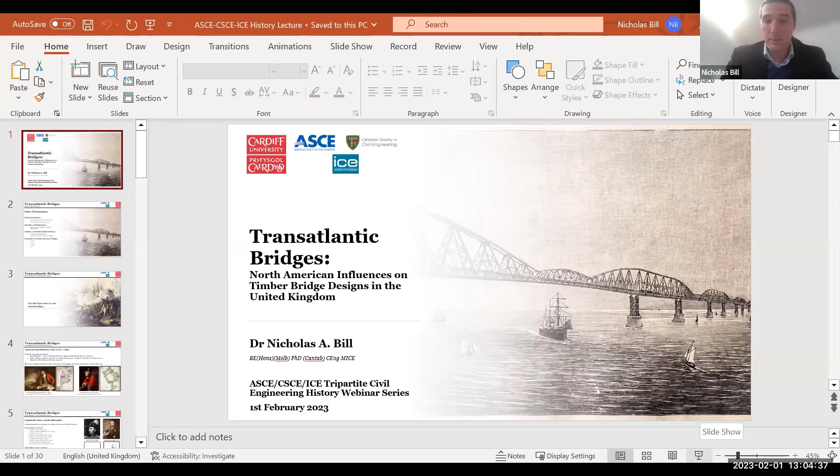Thank you for that introduction, and thanks to everybody for logging into this session, wherever you happen to be. I do think this lecture series is a great initiative, and I hope it continues and fosters further collaborations between our societies. If nothing else, I hope today's lecture is a reminder that we've always had much to learn from one another. Some of you might be surprised, because this lecture may fly against many people's preconceptions regarding the history of technological transfer across the pond, since most people would probably view it as unidirectional, certainly before the 20th century. But we Brits have always been willing to adopt good ideas from abroad, and indeed there are many ideas we've actually ripped off and called our own over the years.

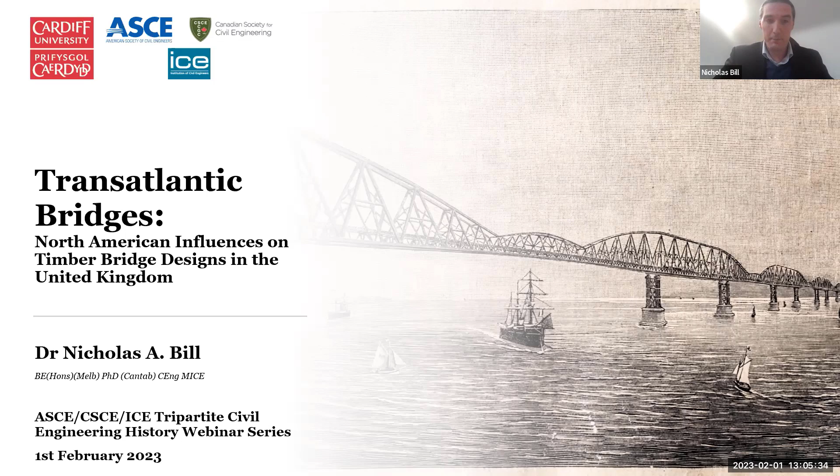Timber construction represents just such a case, and it's interesting to see the origins of some of these designs against the backdrop of developing structural iron. There are four main areas I'd like to focus on in this presentation. I want to begin by discussing some of the early interactions, particularly those who saw military service in North America, as it is highly relevant. Then I want to discuss the role that publications played. Before we get into specific examples, I'm conscious that not everyone will be familiar with what was built in Britain and Ireland, so I'd like to dedicate a slide to the various forms, particularly the homegrown forms. And then finally we'll look at the specific examples that made their way across the Atlantic, with a note about their likely origins.

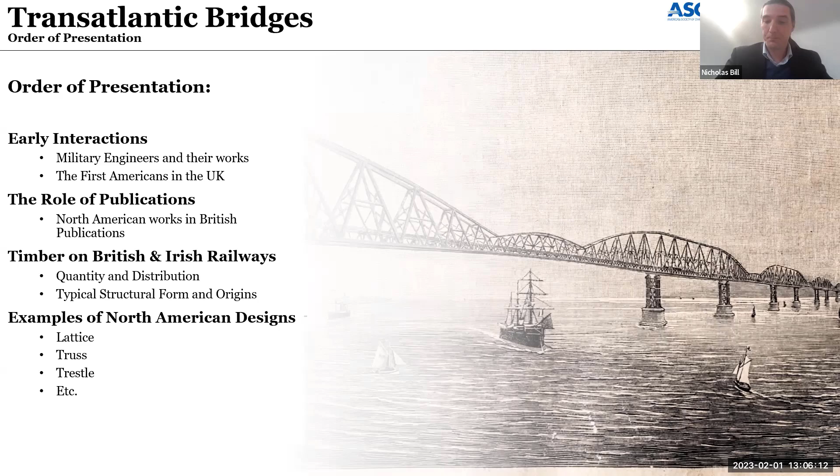If we begin by looking at early British and North American interactions, it's probably fair to say that things didn't get off to the best start.

But regardless, as one would expect, these interactions began well before the advent of the railways. What's strange is, unlike the situation with Britain and continental Europe, war in many ways actually facilitated many of these important connections. It effectively brought the first group of professional engineers to North America who would return to the UK with new ideas. These men were the UK's Royal Engineers.

Essentially, these were the military engineers of the British Army. What's interesting is that from 1741, these men were trained at the Royal Military Academy based in Woolwich, in what was the first technical school in the British Empire. They were given intense instruction in mathematics, mechanics, ballistics, hydraulics, etc., by some of the UK's finest mathematicians and scientists. This started almost a century before civilian engineers took theoretical education seriously.

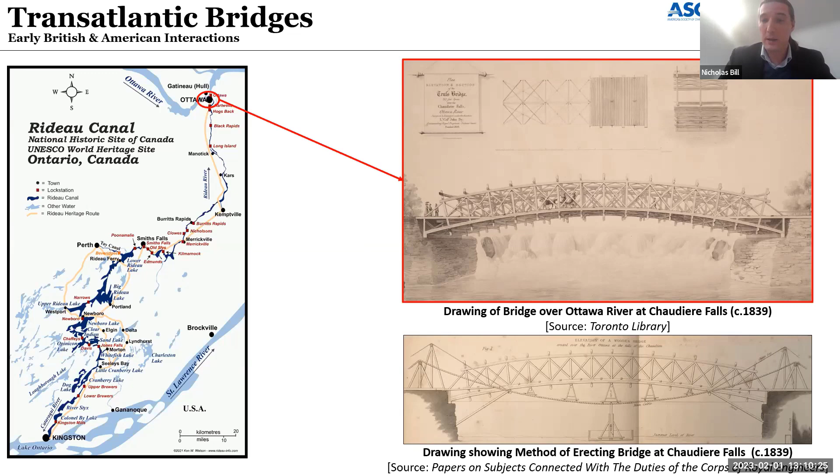Now, By had been stationed in North America for many years before, and he actually brought back American bridge designs. This is evidenced by some of the models that he constructed when he was working in the gunpowder mills back in England. When bridging the Ottawa River, By demonstrated his knowledge of American practices with a design similar to the Washington Bridge built in 1796 by Timothy Palmer. This example spans 212 feet, formed of 3 parallel trusses 12 feet apart. So it's quite a substantial structure.

Further examples of the Royal Engineers copying American designs appear in the likes of Sri Lanka. This concept for this bridge appears in Sir Howard Douglas's treatise on military bridges, and is thought to be a copy of the bridge over the River Portsmouth. Interestingly, Sir William Denison would later cite this as an example to follow whilst he was serving as the governor of New South Wales in Australia.

What's really interesting is that New South Wales would later become known as Timber Bridge State. What's particularly interesting is that you see huge influence of American long-span trusses across that state, both in road and rail bridges. The Royal Engineers continued to take an active interest in American infrastructure projects, with many embarking on personal tours. They even acted as observers in the Civil War and crossed both sides of the lines. Now, whilst these men didn't build railway bridges in the UK, they weren't without their influence.

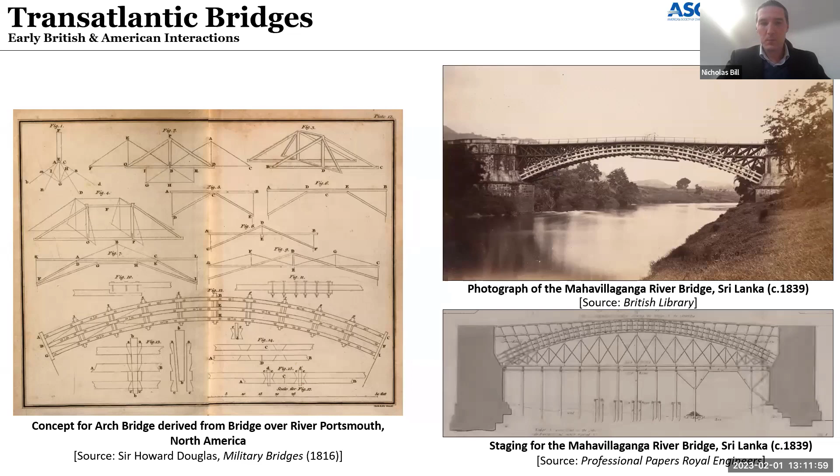What's interesting is that until the 1960s, all the inspecting officers of Her Majesty's Railway Inspectorate, who had to inspect and approve bridges before lines were opened, were exclusively seconded from the Royal Engineers. So these men recorded a lot of detail regarding rail structures as part of their inspection reports. Some of these are quite detailed, such that we get much of our understanding of these bridges, and how they performed, from their reports.

Now, with the end of hostilities, we obviously had the resumption of trade, and with it you start to see the movement of engineers and other technical tradesmen. This happened across the border within North America, and it also happened across the Atlantic. Whilst most historians will typically focus on the attempts, especially in the United States, to acquire certain technologies, and indeed some of our previous presenters in this series have focused on these activities, what's less discussed is some of the people who actually left the fledgling United States for various reasons and tried to ply their trade elsewhere.

What's interesting is that Cox also brought over both the timber and the skilled workmen from America. This practice would later be replicated in the late 19th century by American steel mills who sent men and prefabricated buildings over to Britain. That's a whole other conversation, but for those in the UK who are interested in that, look no further than the example of the Bristol Tramway generator building as an example.

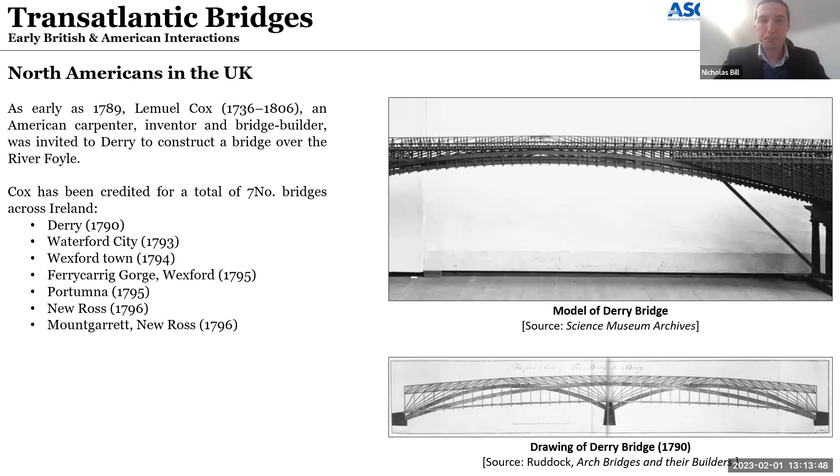But before these steel companies in the United States were in the position to do this, they first had to acquire the necessary technology. So in the very earliest years of the fledgling republic, the United States actively encouraged various methods of acquiring technology, from sponsored visits to almost outright industrial espionage.

One of the series' previous presenters, Mike Chrimes, highlighted the role of William Strickland in the development of the canals, but his reports also extended to the railways.

Some American engineers went specifically just to buy materials and equipment, such as Horatio Allen of the Delaware Hudson Canal Company. Allen would purchase locomotives from John Urpeth Rastrick, and also made the acquaintance of George Stephenson. Both of these British engineers would later go on to build timber bridges.

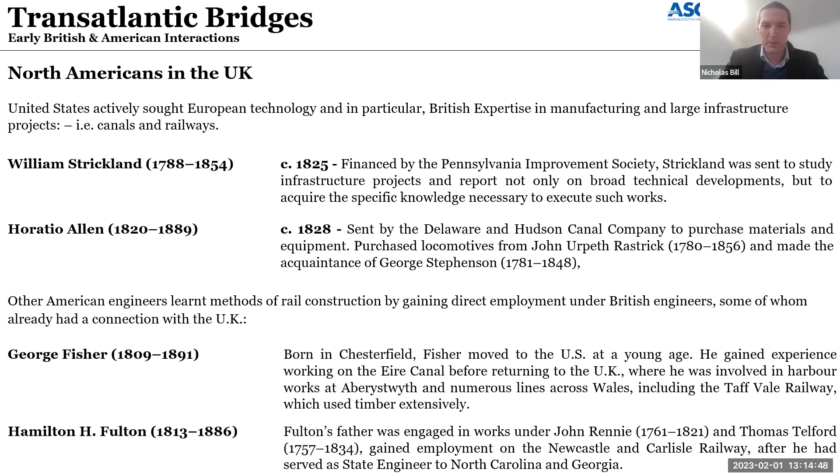For American bridge builders, the rapid developments of iron rail bridges provided an incentive to embark on their own personal tours, whether to gather information or to sell their ideas. We all know that Ithiel Town visited continental Europe and the UK between about 1829 and 1830.

What's interesting is upon his return, he acknowledged that his original pamphlet describing his designs was quite defective in many ways. Although we don't know exactly what he meant by that, or where and when he came to this realization, it has been speculated that he was heavily influenced by George Smart's original design. This begs the question as to what is more influential: an obscure patent that someone had forgotten about, or well-published and promoted designs.

Similarly, at the height of the railway mania, we had Irish-born, American-trained engineer Richard Boyce Osborne, who traveled to the UK acting as William Howe's agent. We know that Osborne presented a model of Howe's bridge to Robert Stephenson, but Stephenson was rather preoccupied with designing his tubes at the time.

He did, however, have much more success in his dealings with Charles Blacker Vignoles, who was planning the Waterford and Limerick Railway and was keen to cross the River Suir with a record span. Although that particular bridge wasn't actually built due to lack of funds, I believe there was a total of 14 iron Howe truss bridges erected between Limerick and Tipperary. These were all designed and fabricated by engineers and contractors from the Philadelphia and Reading Railroad.

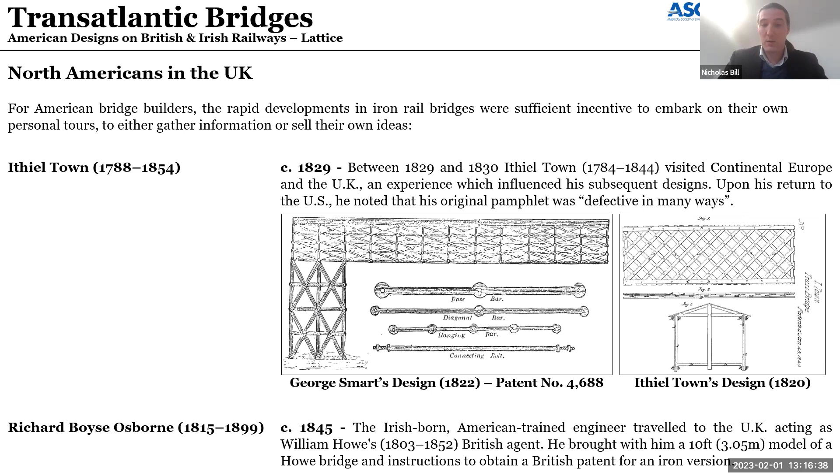The dissemination of North American bridge technology went much further than simple personal observations and interactions between those who crossed the Atlantic. Printing technology improved dramatically in the 19th century, and so did the quantity and quality of technical manuscripts, from individual treatises to published journals. As the number of technical publications increased, so did accounts of North American practices, to the point where it would have been practically impossible for any British or Irish engineer to remain entirely ignorant of developments in North America.

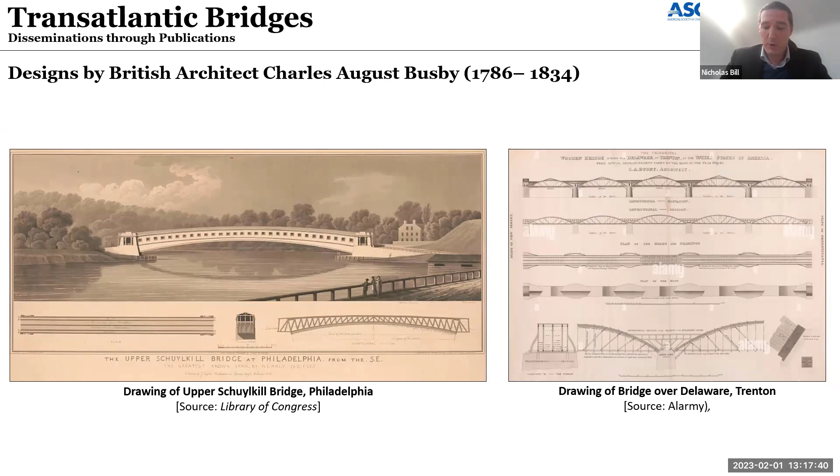Initially, these included isolated accounts of individual structures of significance, particularly within travel books, which had grown enormously in popularity. Others include descriptions of buildings and structures published by the likes of British architect Charles Augustus Busby, as we can see from the slide, in his account of the much celebrated bridge over the Delaware in Trenton. Although this is credited to the American Theodore Burr, the design of this bridge at Trenton embodies the complex exchange of ideas, with its true origins actually lying somewhere in Somerset in the southwest of England. So again, we have this fuzzy period as to where these designs are actually floating around and who's reading what.

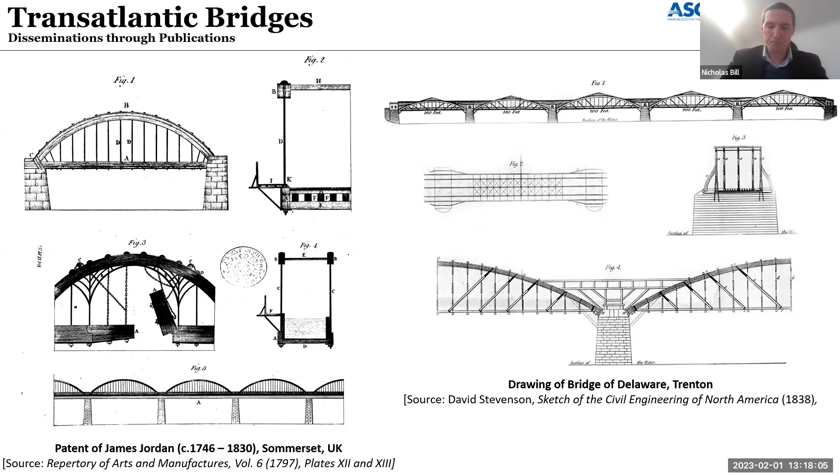Comprehensive accounts based upon study tours were soon published, but whereas the likes of William Scarth Moorsom's Letters from Nova Scotia, published in 1830, provided just a general account of the colony, you start seeing publications such as Sketch of the Civil Engineering of North America in 1838 by the engineer David Stevenson. Now, this focused specifically on engineering projects and provided detailed descriptions of the drawings, which you can see from these slides. He wrote chapters on both bridge construction and railways, and Stevenson produced the first favorable account of Town's lattice and Long's patented frame bridges.

Stevenson's account of Town's patented lattice bridges constructed on the Philadelphia and Reading Railroad actually followed his meeting with their French-trained engineer, Moncure Robinson, who provided Stevenson copies of these drawings. So again, it's interesting to speculate where some of these drawings were actually acquired.

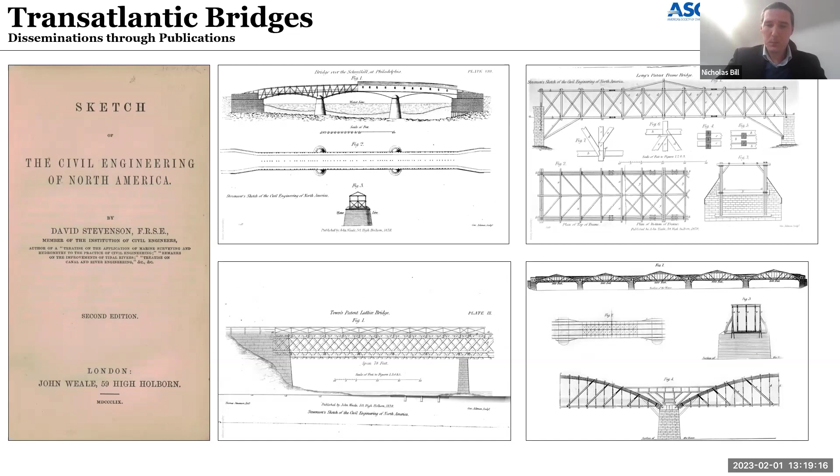Soon enough, British engineering journals began featuring articles on North American engineering practices. And indeed, the very first article of the Civil Engineer and Architects Journal in 1837 contained a feature on American railroads. Likewise, the Artisan, a similar publication, followed suit. Some of the earliest papers presented at the Institution of Civil Engineers also focused on American railroads.

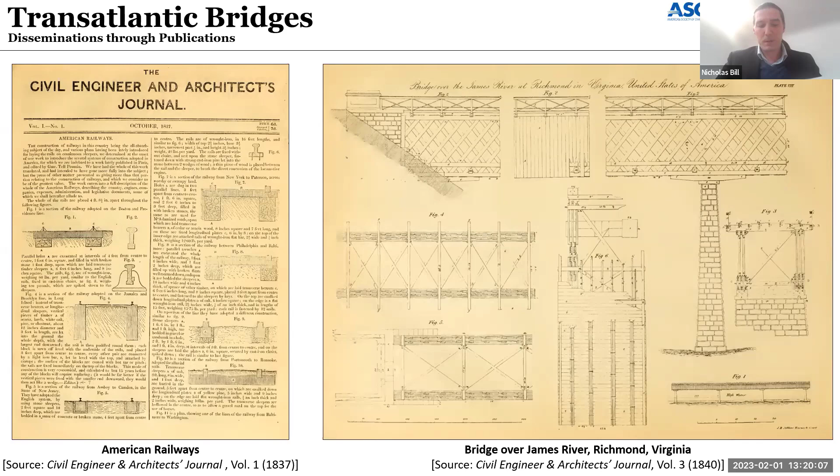What's interesting is Weale also, as with many of his contemporaries, was quite keen to emphasize the financial model on which these timber structures were adopted. That typically involved lower upfront costs in order to open the railroad earlier and start recuperating money. And that was seen as one of the key drivers of adopting timber.

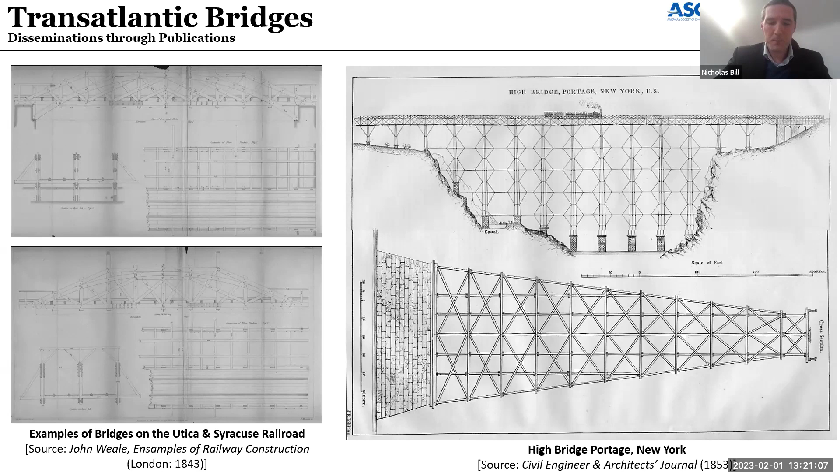It continued. In 1858, we have the American engineer, technical journalist and publisher Zerah Colburn. He actually moved to England to take up his position as the editor of The Engineer, which was by then Britain's leading weekly technical periodical.

Colburn's role provided him with an opportunity to meet many members of the ICE, including Isambard Kingdom Brunel, who produced hundreds of timber bridges. Colburn himself was later invited to present a paper to the institution, but this was on iron bridges, which you can see on the top of the slide. At the same meeting, we get a chap by the name of James Robert Mosse, who was an engineer from Halifax in Nova Scotia, who published a similar account on American timber bridges.

What's interesting is Mosse was actually a pupil of William Scarth Moorsom on the Birmingham and Gloucester Railway. After a stint as his assistant engineer on the Waterford and Kilkenny Railway in Ireland, he returned to North America to work on railroads, and I believe he crossed the border between the US and Canada as well.

His paper in particular includes illustrations of Howe truss designs and the first known account of Daniel Craig McCallum's inflexible arch truss, which is seen on the bottom.

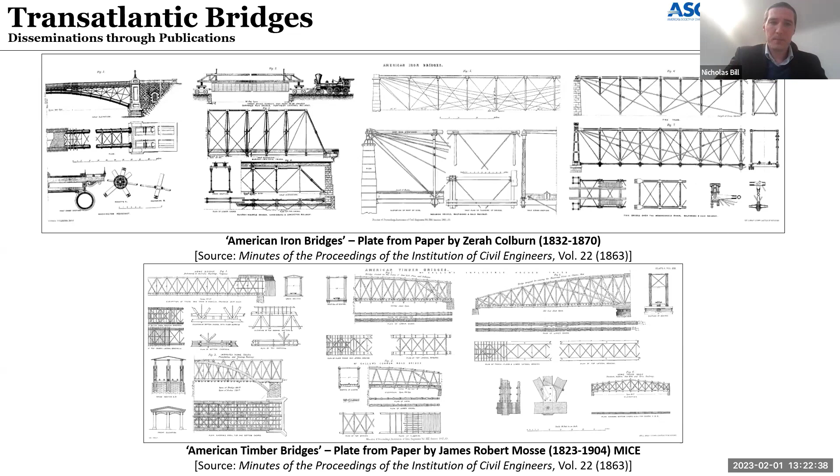Towards the late 1850s and early 1860s, we start seeing American publications republished in Britain. In particular, in 1862, we see Haupt's General Theory of Bridge Construction, which was the first version exclusively for the British market, featuring many diagrams demonstrating American timber bridge design.

The original publication was released in 1851, and we know this was already popular with British engineers because of comments made in inspection reports. It had also become the recommended reading to the Corps.

So again, this raises a really interesting question, and I'd love to discuss this more, about where they were actually sourcing these books, and what sort of network of exchanging technical information was in place, particularly in published texts.

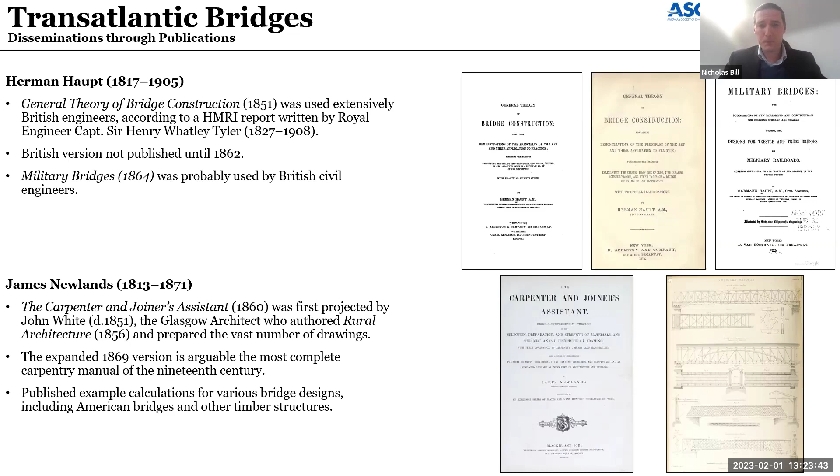Armed with this knowledge, how did we do things?

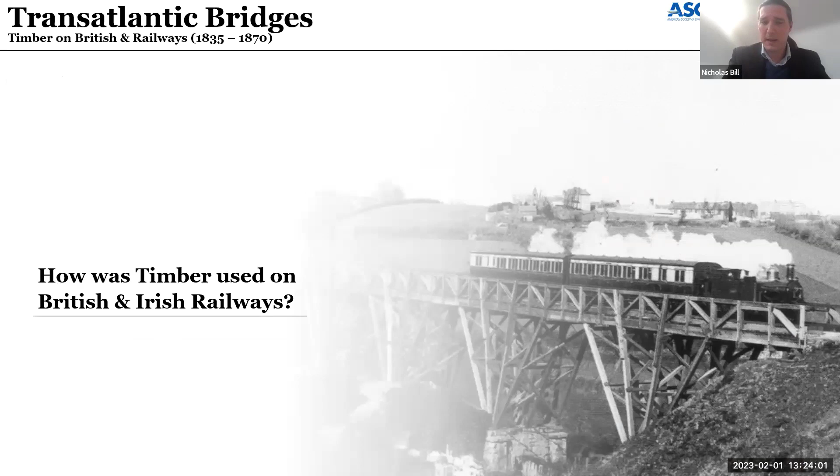For those who are interested, that's an example of one of Brunel's famous fan bridges. He built many of them in Devon and Cornwall in particular.

What may surprise many people on both sides of the pond is that between 1835 and 1870 alone, there was something like 2,500 timber structures built across British and Irish railways, and they were built across 268 different railways.

These railways were originally private companies which raised their own finance and operated independently, but over the course of the 19th century and early 20th century, they were eventually consolidated and ultimately nationalized just after World War II.

Now, in terms of application in the UK, and when I say the UK in this context, I also mean Ireland, because they were still part of the Union then, it broadly followed the overall trends of railway construction, which peaked around about 1848.

But timber construction continued well into the latter decades of the 19th century, even after 1870. I just, for other reasons, decided to cut my period of study off at that point.

It was also used across the geography of the UK, although we do see higher concentrations in typically more rural and isolated areas, especially places like Cornwall, Ireland, the north of Scotland, and also mid and North Wales.

What's really important to note is that timber was rarely the most dominant material used on any particular line. So it was very common to see timber, masonry, and iron bridges all on the same line, built at the same time. So whilst economics was a significant factor, quite often its use had much to do with the conditions of the particular crossing in question.

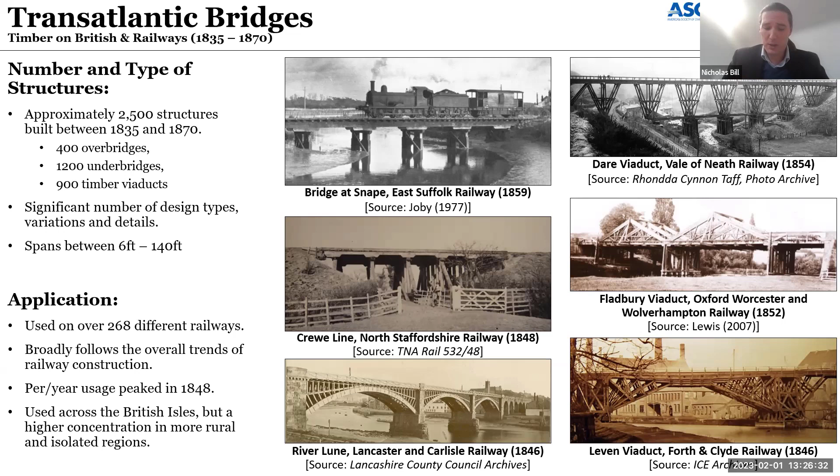When it came to larger spans, British engineers tended to demonstrate a clear preference for arch designs, which were either laminated timber or with polygon arches and their various derivations, such as fan structures.

Understandably, some of the earliest British designs copied from North America were, in fact, arch bridges, as we can see happening on road bridges first.

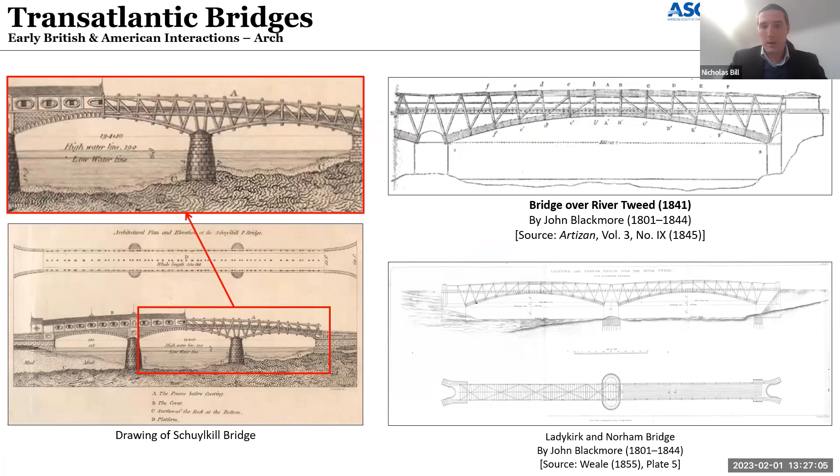John Blackmore's bridge over the River Tweed, seen here on the right-hand side, is a perfect example. It's almost an exact copy of the one on the left-hand side. What's more is it was actually cited by contemporary literary sources as an example for railway engineers to copy. Didn't quite work out that way, but you can see the precise origins of these laminated timber bridges, where we see the horizontal laminations across these arches, is somewhat contentious.

Typically what you see in these examples is the deck is placed above a spandrel frame that loads the arch from above. But when we look at the example that Vignoles built across the River Lune, we start to see North American influences starting to appear.

It's a clear, distinct departure from previous British practices. Given Vignoles' early history in North America, it's most likely that you can see that American influence.

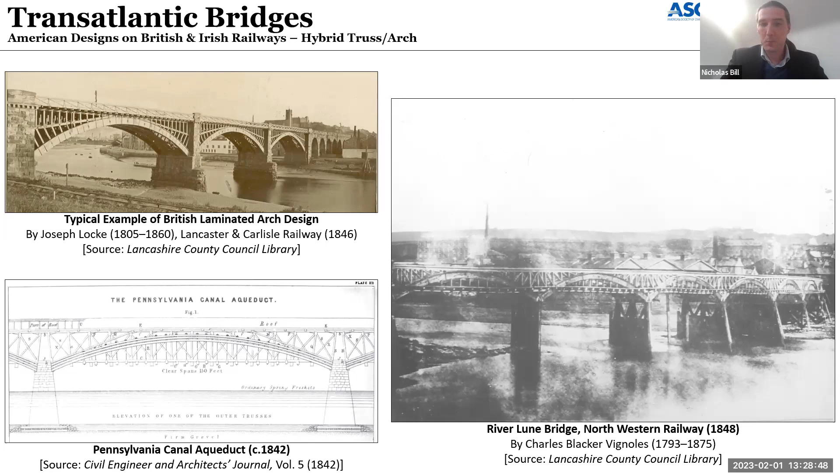There are also inspection reports suggesting that Joseph Locke experimented with integrated arch and truss bridges in Scotland around the same time. At Glenary on the Aberdeen Railway, Locke and his partner Errington reportedly erected a 14-span viaduct, each containing 60-foot spans formed of laminated timber arches placed on either side of a Howe truss.

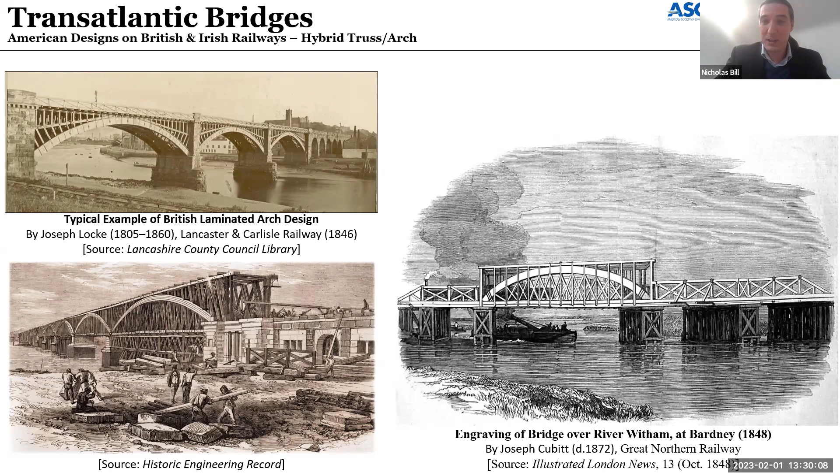What's really frustrating is the drawings are in a fragile state, and the archivists won't let me see it, and it's not been digitized. So it's incredibly frustrating. I hope to one day see it and confirm what it actually is, but I suspect it's a similar design to what we see on the right-hand side.

There is much clearer evidence of hybrid designs mixing trusses with polygon arches. Here on the right-hand side, we see a Howe truss integrated with polygon arches in what is a very clear copy from America.

The one on the right-hand side was built for the Peterborough branch of the Eastern Counties Railway, and it's almost an exact copy of that built on the Baltimore and Ohio Railway, which was then recorded in Haupt's book on bridge construction. This example has been attributed to Robert Sinclair, who had previous dealings with Locke and Errington in Scotland. Sinclair was a locomotive engineer, I believe, so it's unlikely the bridge is actually his - it probably was one of their assistants.

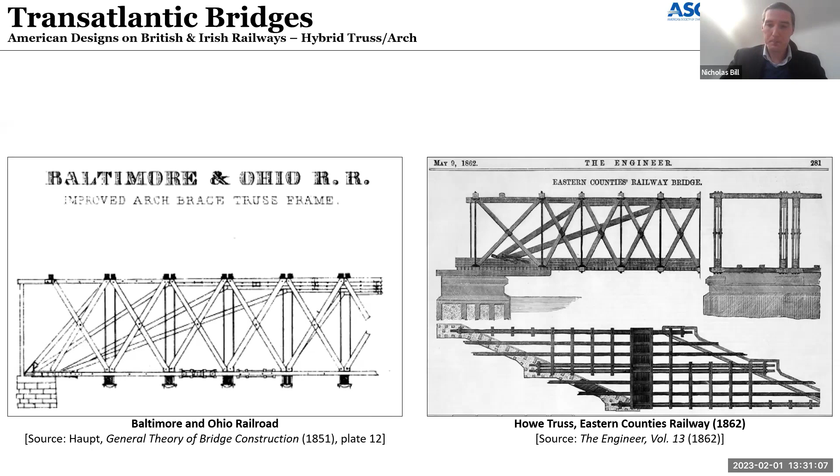As with laminated bridges, the origins of lattice bridges are similarly contentious, but despite what we discussed earlier, I think it's fair to say their development probably owes more to carpenters and engineers in North America, especially New England, than perhaps anywhere else.

Again, we see those with experience and networks linking with North America who then apply these designs in the UK. These in particular were by William Scarth Moorsom, who claimed to have erected dozens of these structures on the Birmingham and Gloucester Railway around about 1838.

However, I can only find hard evidence of around 4 bridges, typically ranging from about 90 to 160 feet in span. What's interesting is there are several differences to those seen in New England. In particular, the position of the deck was set approximately 2/3 of the height of the girder from the bottom chord of the truss. There are no roofs.

I only know of one example of a roof being used. Instead of providing a box, the lattice girders were actually stiffened by transverse and longitudinal bracing positioned below the deck.

I should note that in these examples on the right-hand side, the intermediate supports you see in these photos were actually added after the original construction, owing to performance issues.

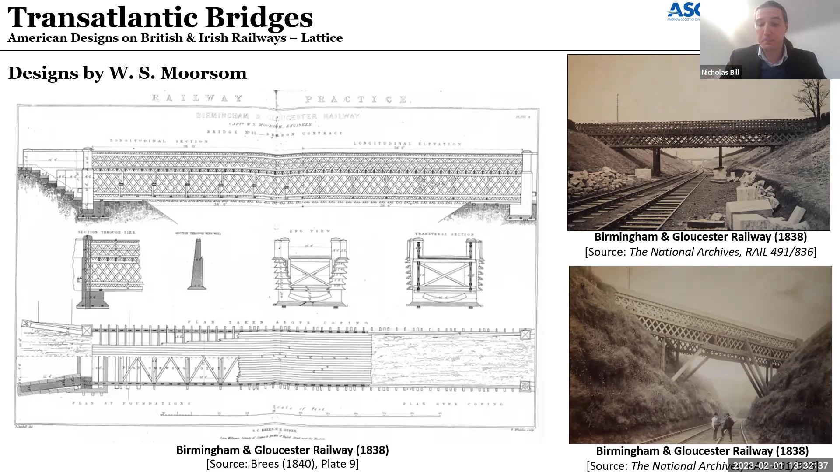Moorsom wasn't the only British engineer to design lattice bridges, and I can't be certain he was even the first. I recently came across this example on the left-hand side, signed in 1838 by Robert Stevenson and Son, which I strongly suspect refers to David Stevenson, author of A Sketch of Civil Engineering in North America, which we discussed earlier.

I don't think this design was actually built, because I have photographs showing a different design that was used. But nevertheless, it does further demonstrate interest in this type of bridge, and there are probably others which have not yet been identified.

Staying in Scotland, we also see Sir John Macneil designing lattice timber bridges, notably this one at Carrion Gill on the Wishaw and Coltness Railway. McNeill experimented with different types of bridges on this mineral line, literally, as he made detailed measurements of deflections under locomotive loads.

The design of this lattice bridge is similar to those produced by Moorsom on the Birmingham and Gloucester Railway, with the exception of the additional transverse bracing to the compression chord, seen on the upper right-hand side of this slide. Whilst this was the only timber bridge that I know McNeill actually built, it was crucial in his development of the first wrought iron lattice bridges, built on the Dublin and Drogheda Railway in his native island. Across the water, we see similar developments.

Moorsom returns to lattice designs for the Nore Viaduct on the Waterford and Kilkenny Railway. Some argue that the Irish engineer Robert Mallet actually completed the design, reportedly using timber shipped over from Canada. In Ireland, we also see a rare example by Isambard Kingdom Brunel, who constructed a 28-foot span overbridge on the Dublin and Wicklow Railway between Drummond and Bray.

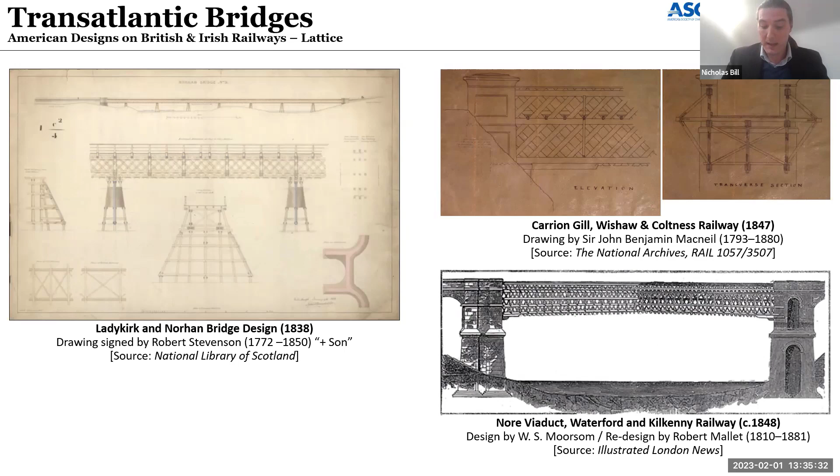Finally, we see the adoption of trestle bridges. What's interesting is despite being widely publicized and indeed championed in contemporary literature, we see a surprisingly small number of these types. I've only identified a handful.

When I say these types, I'm typically referring to high-level or multi-tiered viaducts, which are typically synonymous with American railroads. In contrast, we see hundreds of simple trestle bridges consisting of piers formed of braced piles, constructed right across the British Isles, especially where the line crossed rivers or boggy ground.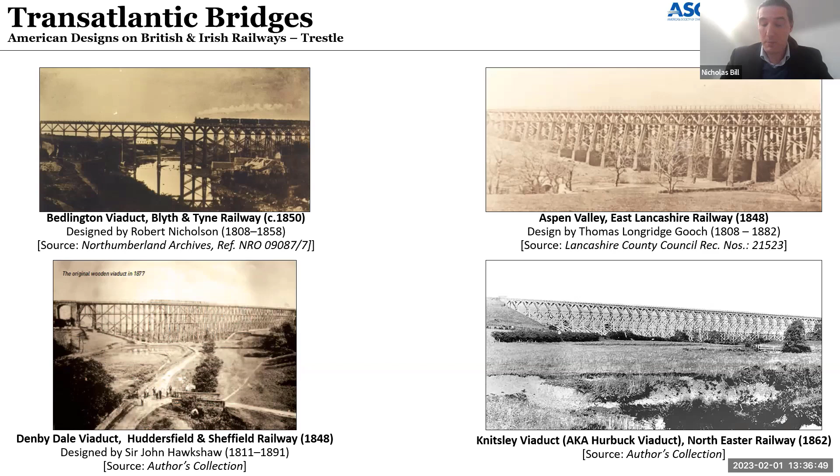However, when it came to crossing rivers or ravines, British and Irish engineers tended to go for structures built off masonry piers, even when timber spans were used. I can only speculate that the volume of timber required to build these structures just wasn't economically viable for them. Another possible explanation is that some viaducts were built with masonry piers capable of supporting iron spans, or even masonry spans, should they be required to do so.

Hopefully hitting time, just wrapping things up. I think probably the takeaway from this is that there is clear exchange of knowledge which is two ways across the Atlantic. We see numerous engineers from both sides cross, and drawings of structures which were either made from observations or exchanged as part of professional networks. That is something I would really like to explore in a lot more detail.

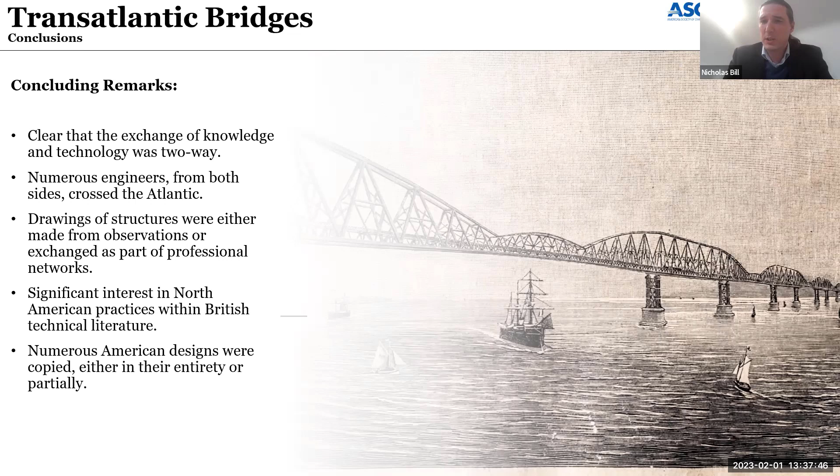We see significant interest in North American practices within British technical literature, both developments in Canada and the US. There's clear evidence that numerous American designs were copied, either in their entirety or at least partially, and adapted, as British engineers did tend to want to do their own thing.